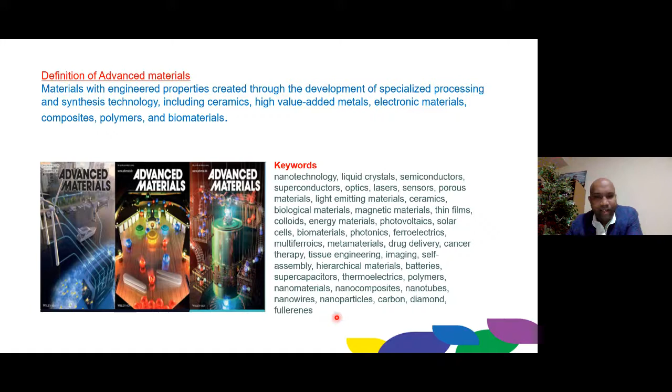And just a quick rundown of the agenda. This is me with the opening remarks, to give you a foundation of the meeting. And then a very exciting keynote talk on materials research in Qatar, challenges and opportunities, from Dr. Hanan from the Corrosion Center. She's the Senior Research Director of the Corrosion Center at QEERI, HBKU. While curating this talk, we had a great conversation regarding various points to be discussed, and she will bring her great experience in this area to give you a very nice talk. I hope you will enjoy it.

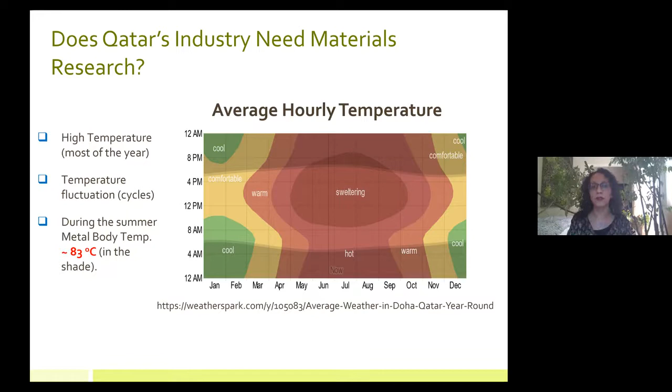So if you measure the metal temperature, the metal body temperature, when you consider the radiant heat, it's around 83 degrees. That's what we measured in the field when we are in the shade. And so you can imagine that it gets very high for metals. And these cycles of temperature create a problem because the metal then starts suffering from stress due to these cycles of temperature.

The other problem we have in the environmental conditions in Qatar is the humidity. We have high humidity in parts of the year, especially the summer months, mainly August and September, but we still see humidity even now in June. The humidity could reach 88%. And when we talk about humidity, we talk about wetness. And when we say that the metal surface is wet, this means that we're getting factors for corrosion. So atmospheric corrosion is a big issue in Qatar.

It adds to it the presence of sandstorms and dust in the air that carries particles like chloride, sulfate, and when they are in contact with water and the metal surface, bingo, you got like a worst case scenario for corrosion. So that also makes the material suffer a lot in our environmental condition.

So this chart is one of my favorite charts. I've used it a lot and I still like to use it because I would say this is the evidence that we got from Qatar Petroleum. On a rare occasion, Qatar Petroleum did a survey of their failures between 2002 and 2006. So they looked at all the failures that the company had, and what caused these failures. I guess Qatar's name is missed here. So it's the Qatar Petroleum chart.

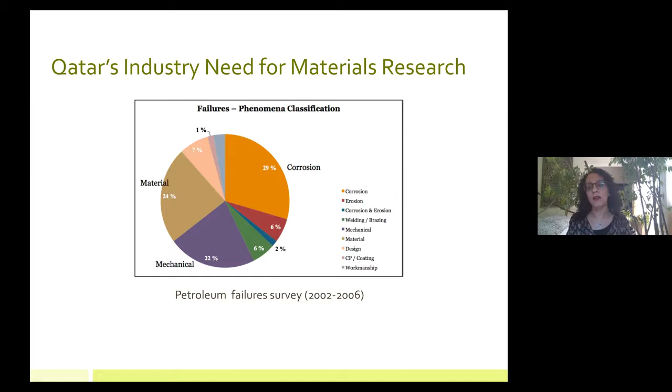So where we are now in Qatar, most of the material science research is focused on developing new products. We see people making new coatings, developing new membranes, enhancing material properties, developing heat treatment procedures. We're looking into making new products all the time. And these products are mostly tested in the labs, which makes it difficult to prove if they can actually perform well in industrial applications. So these great products have been developed, but there was no testing that shows how they work in the real operating conditions, which makes it difficult to market and use these products. So that's what we mostly are doing, and we should try to look at a different perspective here.

Field studies that we do are very, very limited. And the problem is the limited access to industrial fields. Some people were lucky, they get to work with Shell Qatar, for example, and they give you access to their platform, so you can put samples there and look at them. You could put samples in streams and look at their corrosion or their behavior. So these are lucky researchers, but not all of us had that opportunity. So that's the problem.

Some of us work on simulated field studies. So they simulate the field conditions in the lab, but it's also challenging because the real field conditions are sometimes difficult to simulate in the lab. I'm going to give an example of this. I've been working for the past, let's say, 8 years on chloride stress corrosion cracking. My area of interest is environmentally assisted cracking, and this is one of them. And so I've been doing this work in the lab to simulate the field conditions. And normally when people do chloride stress corrosion cracking, the common test we use is called the slow strain rate test.

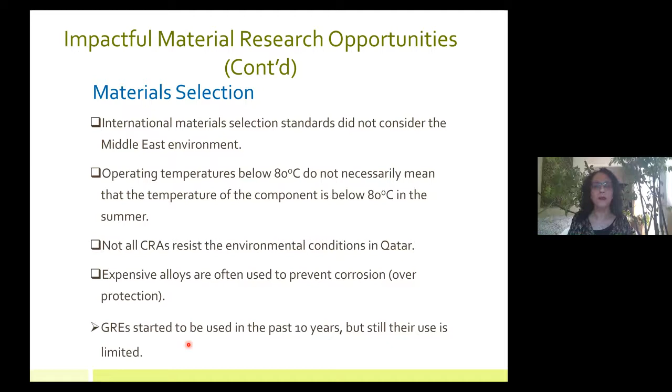GREs started being used around 10 years ago in Qatar, but people are not comfortable with them and they're still not used much. Their use is very limited, and that's an area that can be explored.

So what are the challenges we face? There are a lot of topics we can work on, but we still have very limited industry-oriented research. Why is that happening? It's interesting what you look at - if you look at my first point, Qatar has the highest GDP in the world. This should be good news for us, but unfortunately some are misusing this. I worked in plants in Qatar, and if something fails, what they say is, okay, it failed, let's replace it.

We got the money, that's the attitude. They don't look at it as, oh, it fails. We have to go check and do a proper investigation, simulate the conditions in the lab, look at everything and find out what caused this failure and what we should do to prevent it, using the same material, maybe something even the same price.

And so that's the problem, that people just get used to just replacing things. RDI is still considered a new concept in Qatar. People don't understand what it is.

The other problem we have is that professional development and training opportunities in Qatar are very limited to non-nationals. So you get people who work in the plants for 35, 40 years, and they maybe got training once. Then you come in with a new concept, you want to use new models, apply new software, put sensors to measure and detect leaks. They don't understand this because their knowledge is 40 years old and they consider you a threat. So they don't support it.

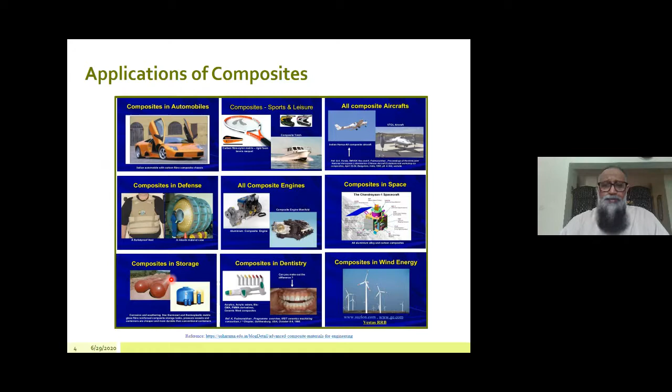So to sum up, we can say that composite material is an important class of engineering materials which have numerous applications in the field. Before going into the detail of the project, let me introduce the concept of composite material for people who are not directly associated with this field.

Basically, a composite material is composed of a matrix material and a reinforcement. The beauty of the composite material is that when these two materials, which are physically and chemically different, are mixed together, the parent phases combine to form a product phase, the composite material, which carries much superior properties as compared to the parent phases.

So the outstanding advantage of composite material is that when two different materials are combined together, they give a product phase that has much superior properties as compared to the parent phases. There are different forms of composite materials, which I will show you in the next slide.

Composite materials can be classified on the basis of matrix materials and on the basis of reinforcement. For example, in the matrix we can have a metal, a polymer, or a ceramic, and people have also categorized carbon as a matrix material. So based upon these matrices, we can have metal composites, polymeric composites and ceramic composites.

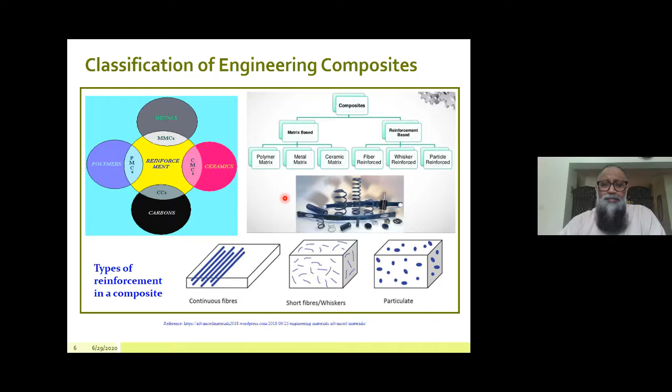Let's talk about aluminum metal matrix composites, because they are finding numerous applications in the automobile industry. As I introduced earlier, aluminum is a lightweight metal, and that is why it carries significant advantages. Aluminum metal composites have important uses in the transportation industry, or we can say the automobile industry.

It is not only the economy that is related to fuel consumption. It also contributes indirectly to controlling environmental pollution, because we are using less fuel, and that will pollute the environment less. So that is why aluminum metal composites are finding extensive application in many automobile industries.

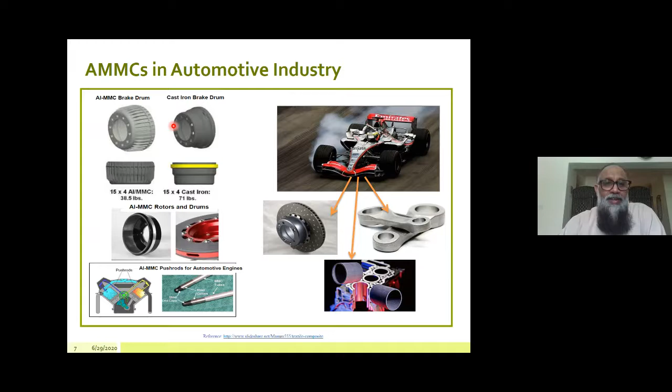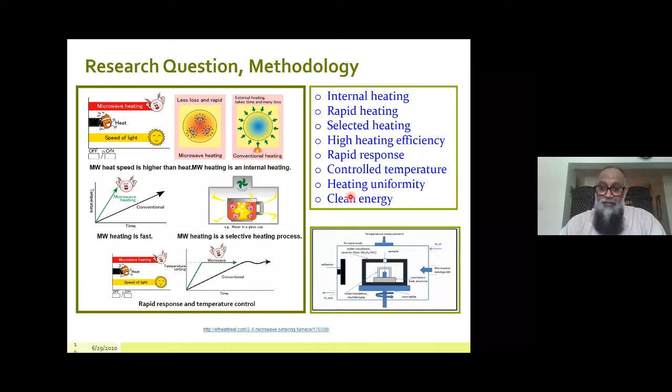So we have developed many compositions for aluminum metal composites, but because of time limitations, we will be briefly focusing on 4 compositions: aluminum silicon carbide nanocomposites, aluminum oxide nanocomposites, aluminum boron nitride, and aluminum titanium carbide nanocomposites. These are the 4 compositions which will be briefly talked about in today's talk.

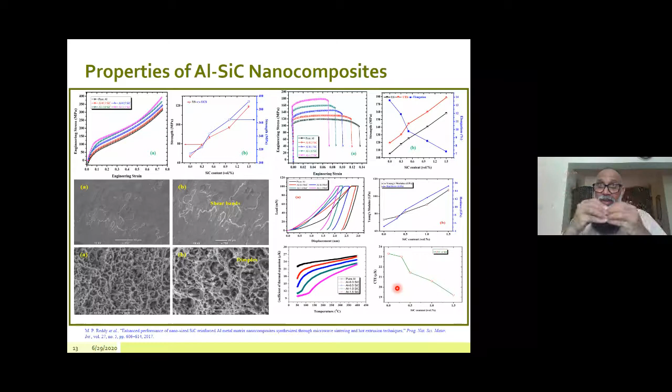We also studied the coefficient of thermal expansion of all the developed compositions. The coefficient of thermal expansion decreases with increasing silicon carbide nanoparticles in the matrix. This is a very important criterion, because in automobiles, especially in moving parts, the coefficient of thermal expansion is very important. Two parts moving relative to each other, because of their movement and the temperature, may choke together if there is high thermal expansion. That will hinder the performance of any vehicle. That is why the decrease in thermal expansion coefficient has a useful impact on the performance of moving parts in the automobile.

The second composition I would like to share is the aluminum oxide nanocomposites.

So we have... Sorry to interrupt. You have a couple of minutes.

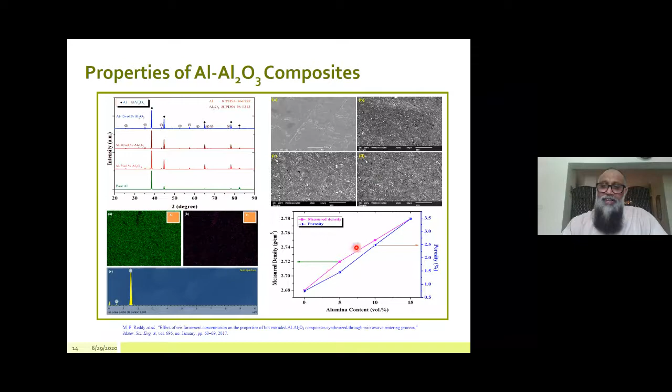And these are some mechanical properties as I have discussed earlier. With the increasing amount of boron nitride in the aluminum matrix, we have seen improvement in the tensile strength and compressive strength, and we have observed a reduction in the elongation. So these are also similar results as I have explained earlier.

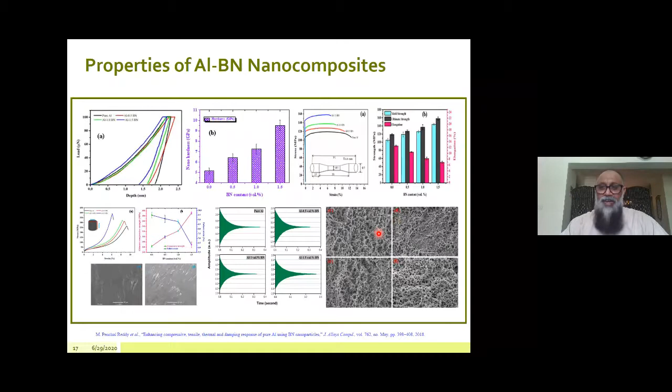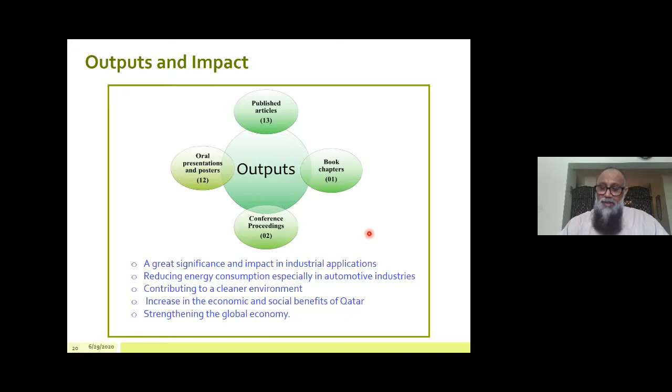As far as the impact is concerned, with the development of a novel formulation with promising mechanical, structural and thermal properties, it is anticipated that they have good applications in the automobile industry, and a lot of fuel consumption is reduced. Because of the utilization of less fuel to drive the vehicles, we think that it has an indirect impact on our climate and the environment. There will be less pollution because of less fuel being injected into the automobiles.

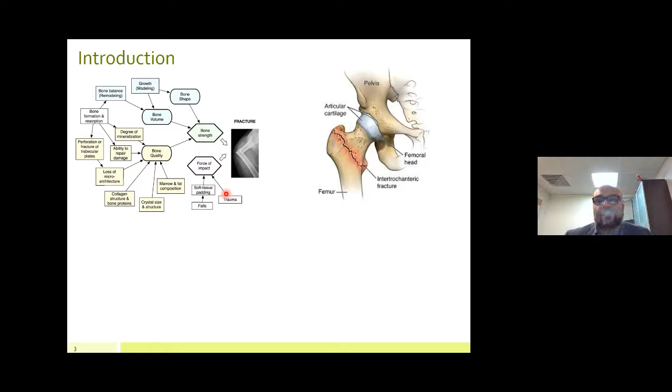Usually it is when you have a fall. This is very common in elderly people, especially females who have osteoporosis, and when they have a fall, it will lead towards a high impact on your bone and cause fracture. And also during trauma, for example, an accident can happen to young adults. The accident can be through automotive or through sports where there's a high impact on the bone and the femur bone fractures. All these conditions require hip replacement.

And the hip fracture is not something that you want to face. It will cause a lot of discomfort and will affect the quality of life. As you know, the femur or the hip bone is actually carrying the weight of the body.

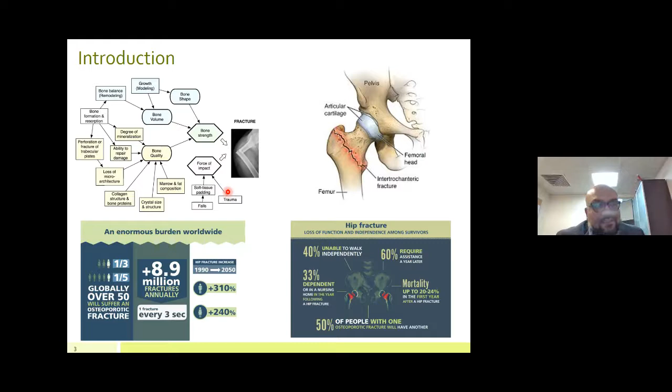So this joint is very crucial to have a good quality of life. Now, is this a burden? Yes, this is a burden, and every year the number of fractures is increasing, mainly due to the lifestyle that we have today, where obesity is on the rise, and obesity also leads towards poor bone quality and extra weight on the bone, and this increases the risk factor for bone fracture. So femur bone fracture leading to hip failure is not uncommon, as I said earlier, and this is an issue globally.

Right, if you allow me, just to give you the market of just the hip replacement itself, the whole process, the market currently is around 7.13 billion, and by 2026 it's expected to reach around 10 billion. This is the market size just for hip replacement, not looking at other joints in the body. So as you can see, it's a very big market, and this is something that is happening very frequently. So the hip fracture, as I mentioned, is unavoidable and it's a billion-dollar industry.

But what is important within this hip replacement is that between 5 to 15% of the patients who have received this replacement are required to undergo a revision surgery. That means a second surgery. Why? Because the hip implant failed after a couple of years in the patient. So this hip revision is a very costly process. It's very complicated, it takes more time, and it's something that we want to avoid, if possible, for patients who are receiving the hip implants.

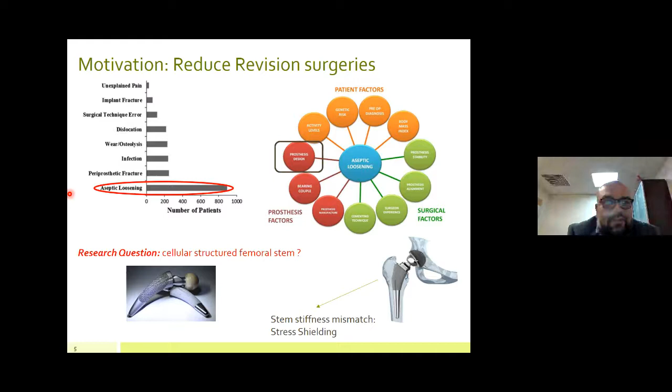Once the femur bone loses density, the quality of the bone surrounding the stem decreases, and this will affect the stability of the implant in the femur bone, resulting in the failure of the implant and the requirement of a revision surgery. So the research question that we had in mind is, can we reduce the stiffness of bulk titanium by introducing a cellular structured femoral stem?

That means instead of using dense bulk titanium, can we design a complex structure within the titanium, whereby we are still using titanium, but due to the cellular structure, we bring down the stiffness as close as possible to the femur bone, such that we can reduce the stress shielding and therefore improve the stability between the stem and the bone. So that is the research question that we had in mind.

Now, the main objective for this study is that we were looking into developing a fatigue design space for cementless porous stems, where we hope to achieve a stiffness of the stems as close as possible to the femur bone. At the same time, we're trying to reduce the stress shielding, and finally enhance the stability by increasing the contact between the bone and the implant. Most of the work was done computationally, and we did one or two fatigue tests. So this is the limitation of the study.

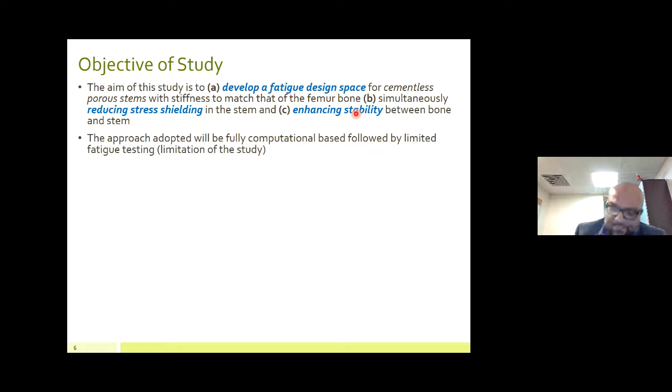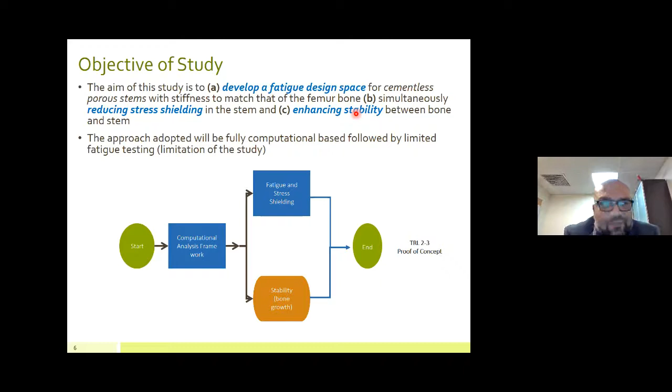Allow me to share with you a flow chart. So basically, the whole project was design-based through a computational approach. We had two aspects. One is looking at the stress part, and one is looking at the stability, basically the bone growth around the stem. And from this, we came out with novel designs, porous structures, which achieved the objective of the study. And at this stage, we achieved a TRL of 2 or 3. which is a proof of concept.

Right, let me give you an overview of how we proceeded with the study. Generally, we looked at the microstructure part: how can we design a porous structure?

We did some sensitivity analysis to play around with the size of the unit cell of the porous structure to make sure we achieve effective properties close to that of the bone. Once we designed the porous structure, we had it embedded into the stem, where the outer part is a dense shell and the inner part is the porous structure. This whole combination gives us our femoral stem.

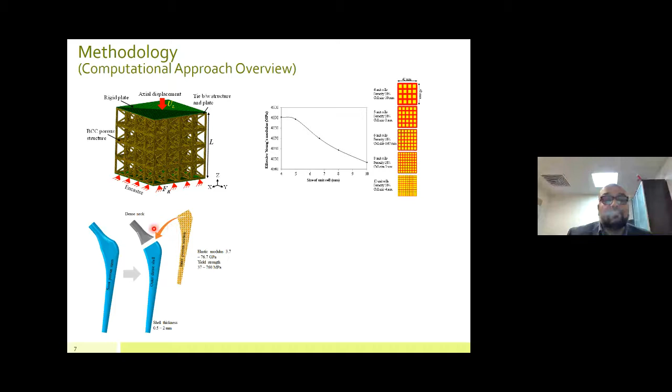To repeat, the outer part is a dense shell within 0.5 to 2 millimeters - these are our design parameters. Inside this dense shell is where we embed the porous structure made from titanium. This whole volume of porous structure reduces the mass of the overall implant compared to bulk titanium, and also manages to reduce the stiffness of the bulk titanium close to that of the bone.

By using the ISO standard, we managed to conduct our studies through the computational approach. The first step was we created a few microstructure unit cells, and then we looked at which of these unit cells, after going through this process, give us properties close to the femur bone.

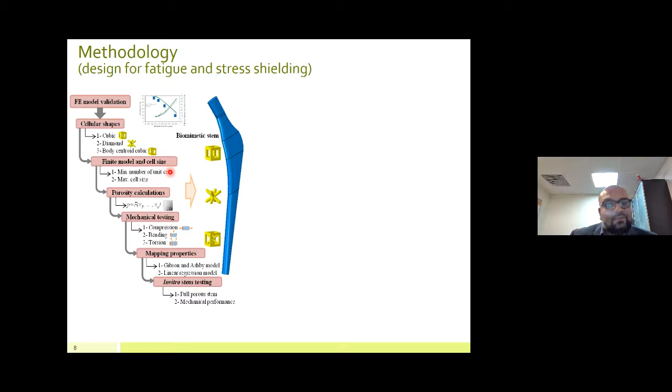This is the roadmap that we took, and once we found the properties of the microstructure and the way to design it to achieve ultimate stiffness close to the femur bone, that was our design. Then we used that to construct the full implant. So this explains the approach.

We basically played with different porosities of the microstructure. We had some compression tests to determine the elastic modulus and the yield strength, and then the best candidate gave us the full model of the stem.

Once we achieved the full model of the stem, we proceeded in two aspects. It was reported in literature that cellular structures have a fatigue strength of about 0.3 of the yield strength. Taking into account this finding, looking at the stiffness of the stems and trying to push it close towards bone stiffness, and looking at the stresses in the dense section of the implants, we created a design space. This design space is where our design parameters fulfill the requirement of the implant.

To strengthen this further, we went into actual fatigue analysis. We used the Soderberg approach, and created another design space from this, then combined both design spaces in a more conservative manner to achieve the final design space, which we'll share with you later. This final design space allows designers to select design variables customized for different patients. That's the idea of creating such a design space.

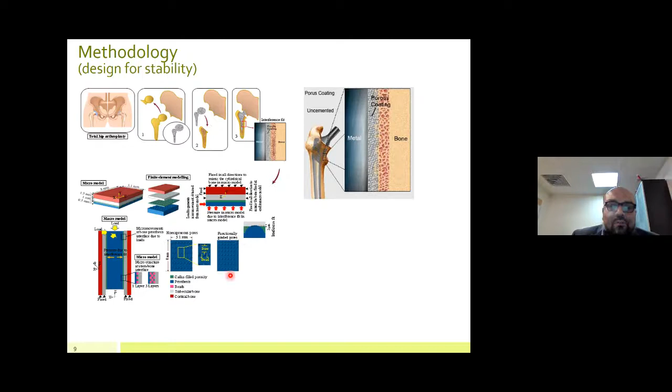Traditionally, most implants use a coating onto the metal, and this coating is a sprayed coating, very random. We want to bring this one step forward and design the way we do the coating, through introduction of beads.

Arrangements of pores or beads on the stem to improve the anchorage between the metal implant and the bone. We played with various combinations on how we can arrange the pores or beads on the outer surface of the implant and see which configurations allow better bone growth, which in return improves stability.

And we basically developed our own algorithm where these are the various options of... can you hear me? Yeah.

These are the various options of designing the pores or beads. And then we have the finite element model. Here, we have developed an algorithm that simulates bone growth by looking at the strains on the tissue.

Various micromotions lead to different strains, and these strains lead to different promotion of bone growth. So there was an algorithm developed, and we used this algorithm to study if a particular design of the pores or beads actually enhances tissue growth on the stem. This tissue growth is needed to enhance the stability between the implant and the bone.

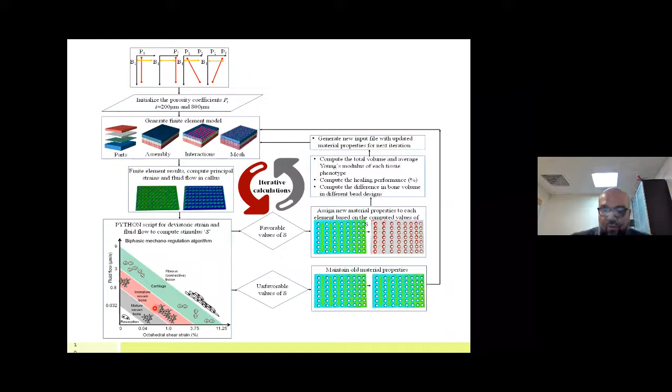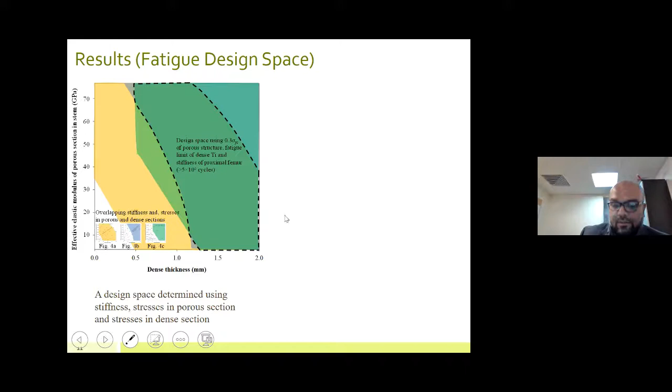Let me just go back one slide. So the second design space, that is the final design space. That's where we incorporated the design space on the left with the Soderberg approach. The gray area is the targeted area that we will use in selecting design parameters that we will later fabricate and test for our fatigue testing.

So these findings showed that the different pore designs actually affect the way you increase your stability. And this study shows that we can achieve significant bone growth, at least through the computational approach.

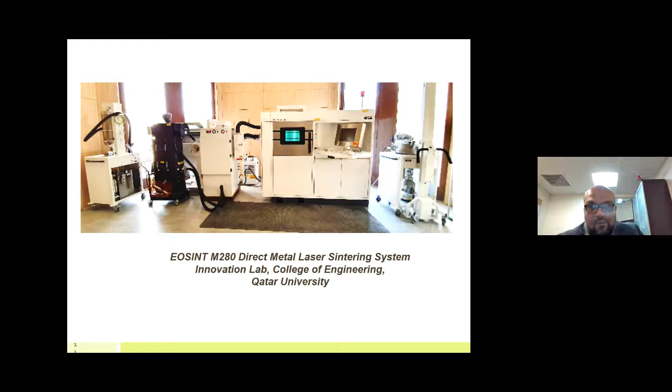Finally, we managed to design - we have a final design here, and we managed to print the stems, and we tested the stems in fatigue, and they achieved beyond 5 million cycles, which is what we are looking for. But there's still room for improvement, but this is a good achievement for a concept stage.

So all this was done here in Qatar. And the outputs is we managed to achieve a full porous stem of 20 gigapascal, quite close to the stiffness of the femur bone, and we managed to reduce the stress shielding by 30%. So most of our targets in the project were achieved. And also with our new approach in the algorithm for stability, we have proven that we can enhance the bone growth along the stem by designing certain pores or beads on the outer part of the implant.

Now, in terms of benefits, this study shows that we have the capability of designing new implants which can be customized for patients. Currently, most implants in the market are not customized - they are bulk design, so the surgeons during the surgery will adjust the fixtures in the stems to fit the patients. But with this now, we can have specific implants designed for patients based on their bone strength, based on their height, their weight, and so forth.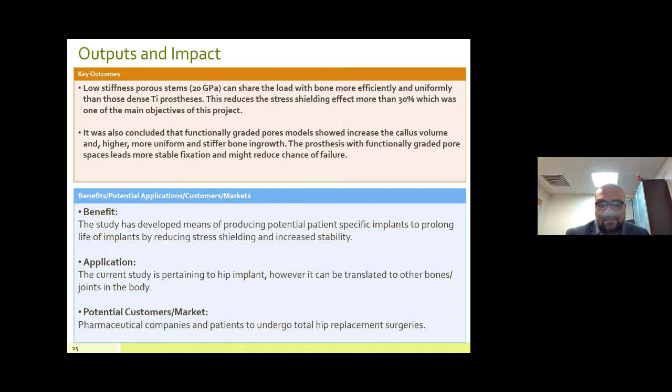So this is a concept that we just came from this study, and we are happy with the concept, and we hope to bring this forward.

So we just completed stage 1, and there is still a long way to go before we can actually see this in the market. Stage 2 basically is we have to further enhance the experimental study in terms of more fatigue designs, more fatigue testing, and improving the design, followed by some cadaver testing, where we will put this implant in cadaver legs and use some hip simulator overseas to see the performance of the implants in the actual gait cycle.

And once stages 2A, 2B are clear, then maybe perhaps in stage 3 we are looking for some clinical trials if that is possible. But the whole duration from stage 2 to 3 will take around 7 to 8 years before we can actually see a finalized concept to be commercialized. So the research work has given us 6 papers, which we are happy to publish with the team.

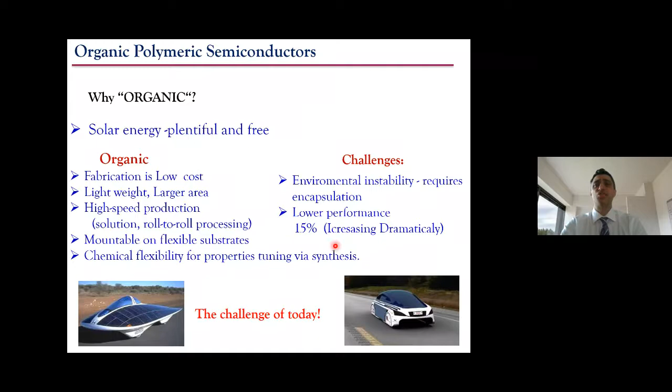However, there are challenges associated with these materials. For example, their environmental instability and their lower performance. I've put lower performance in terms of that we've reached 15%, and about 3 days ago, these materials have reached 18%. So it is increasing dramatically over the last 5 to 10 years.

So if we want to visualize the future for 1 second, think of materials that could be low cost. We could reduce the carbon emission, carbon dioxide emission in particular. And imagine there are currently about 1.5 billion people out there without electricity. If we can make materials that are affordable and cheap, everyone in the world could have a better life.

So visualizing the future for 1 second, if we could learn from the materials that we have from graphene, implement it into the plastic electronics or conjugated materials, we could derive new materials that are advanced and a new energy source could be obtained. We don't have to rely on hydrocarbons from the petrochemical industry. We could leave the hydrocarbons for more essential stuff, for the pharmaceuticals, for advanced material processing. So that is basically the idea.

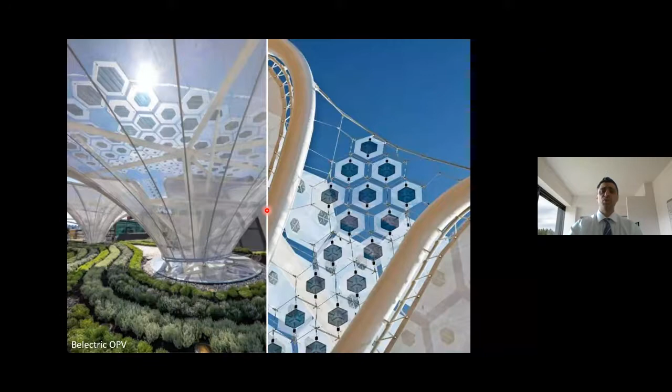And you can see that these materials could be utilized on buildings or even on stadiums. So for example, in Qatar, we have the World Cup coming around soon. Imagine we could have a stadium where during the day, all the sun is absorbed, and then you could turn on the stadium at night with these materials. If you've been to Singapore, for instance, there's a park in the middle. Imagine we could have these materials that are organic based, flexible, that absorb the light during the day, and light up the park during the night without using any electricity.

Other aspects of these plastic electronics, I had a video, but I'm not going to play it in case it might not work. So these have huge amounts in medical applications, in gaming. Again, a lot of people like to read on the plane. All of us use iPads. Imagine you could download the material that you have on a small pen and then read it at your own convenience. A lot of people are using iPads. It could save storage and space.

Recently, the project allowed us to publish one of the highest impact papers, I think, in research, based on designing flexible and stretchable electronics. So if you're interested, please have a dig and read more about these flexible electronics that we have demonstrated.

So what was the idea of the project? The idea of the project was, can we utilize sustainable materials? Fabricate them without using any halogenated solvent, with mild process conditions. Can we have atom economy, in terms of it's non-toxic? Can we make materials that are biosustainable and renewable?

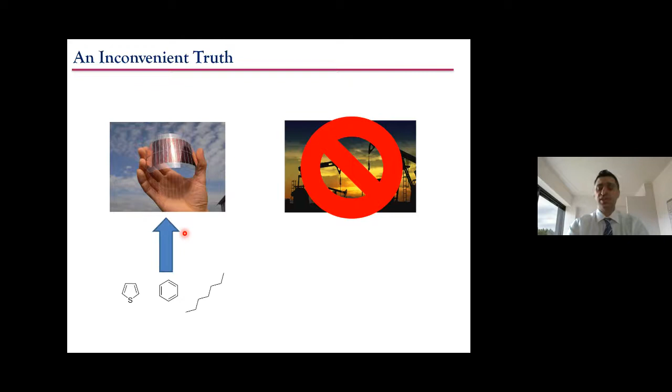Unfortunately, most of the time, till now, we need to utilize the petrochemical industry to make these materials. Can we avoid that? The truth is, we still need the petrochemical industry to derive our starting material. Can we use something alternative? Can we make it sustainable without using any fossil fuels? However, waste is another problem as well. When you have conjugated materials or any materials, you're generating waste. Can we improve biocompatibility, which would lead to better bioelectronics?

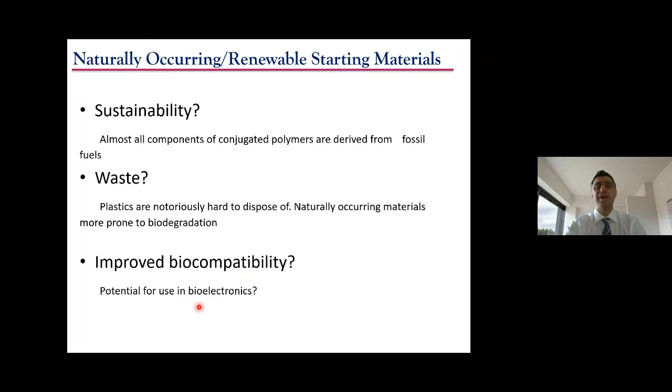Unfortunately, it's predicted that in 2050, there's going to be more plastic in the sea than fish. So obviously, fish lovers are going to suffer. And plastics are known to be notorious for getting disposed of. That's a problem.

So where was our starting point? Can we avoid using fossil fuels and use a nature-derived material to obtain the conjugated material that we want? Can we make the entire material sustainable, derived from nature? Having a material with a furan that could be obtained from corn, having side chains that could be obtained from coconuts, and obviously nitrogen and all other sources can be available.

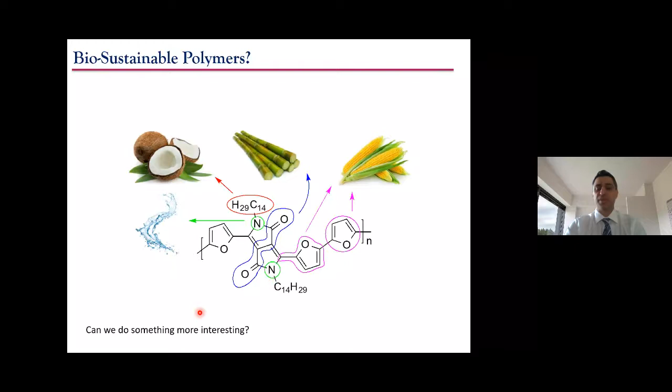Can we do something interesting? So my group looks into thiazole materials. The medics, or the people that work in the medical field, know these thiazole materials are very useful. They're building blocks for anti-cancer and antimicrobial behavior. They're available in many varieties of foods that we eat.

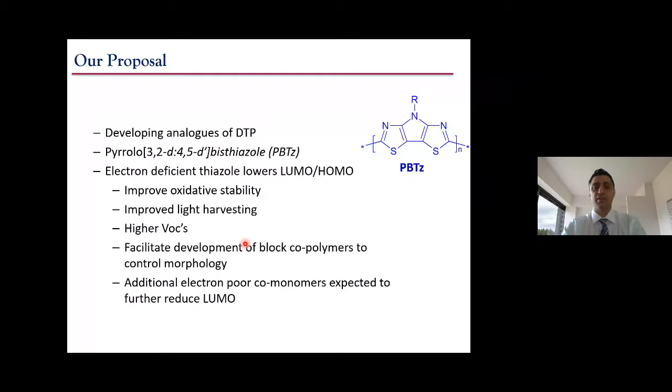It's based on a 5-membered ring with nitrogen and sulfur. So can we make materials based on this thiazole, or you could call it pyrrole system, that could obtain efficiencies or mobilities for plastic electronics? So the idea basically, as I said, we need to learn from graphene, and can we make ladder-type materials that could be also thermochromic?

So for example, at night or even during the day when it's hot, the material lets light in, but it stops any of the heat coming through by changing color. Can we do all that and have the material be intact? So as I said, graphene is very good for that. However, the problem with graphene is its solubility.

With these conjugated materials, we have the problem of torsional defects. So basically they rotate and they cause problems. However, graphene doesn't have that. We aim to make a material in between these two that eliminates these torsional defects, that is similar to graphene, but can give you solubility.

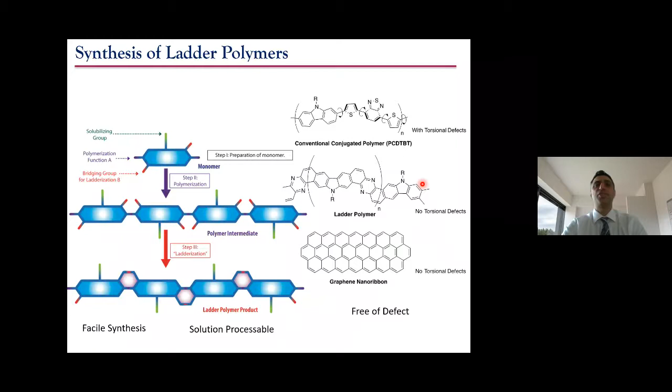So the work was perceived really well by the research community, and they liked our work so that they put it on their front cover in Chemical Science on 2 different occasions, in 2016 and 2017, where we demonstrated that we can make such materials. I will speak to you a bit more about them. Also recently, Chemistry of Materials highlighted the work on their front page, where we use these for plastic electronics, and we made some nice materials.

So the postdoc that was working in the group, Maciej Barlog, the idea was to implement these thiazoles, the nature-derived, thiazole-based electron-deficient system, on these ladder-type systems. I'm not going to talk about the synthesis, I'm going to keep it basic, but we managed to make some different materials having different alkyl chains to give us the solubility for these materials.

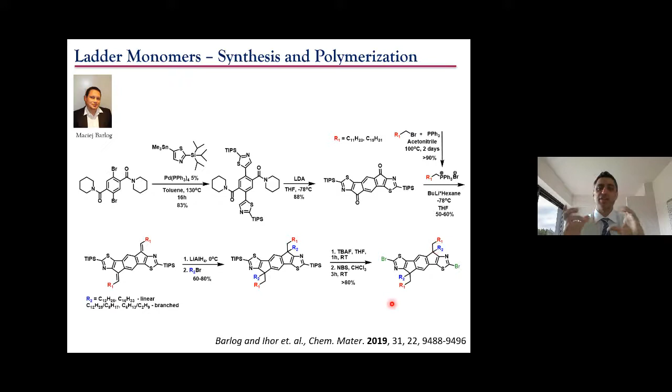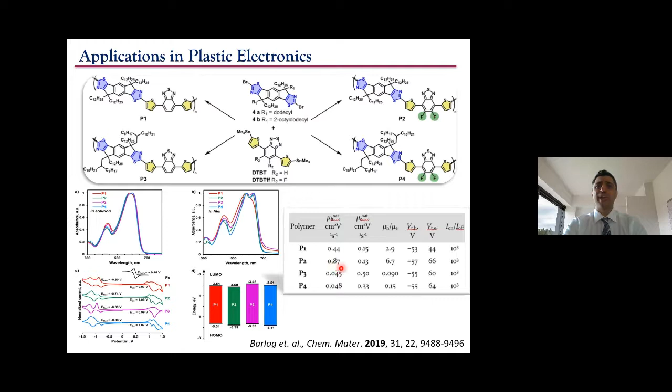We made some polymers, and as you can see from the table over here, the highest mobility we obtained was 0.87. I should just highlight this. This is probably one of the highest mobilities reported to date with these types of thiazole materials. Usually the values go between 0.2 to 0.5, but 0.87 is one of the highest reported to date.

We were also interested not only to see if thiazole had an effect, but can we change a heteroatom? For example, sulfur is naturally available. Garlic contains a lot of sulfur. Can we change the carbon or nitrogen to sulfur and to selenium, modify the ring system and get mobilities? And this work was published in Macromolecules, which showed good mobilities for these materials.

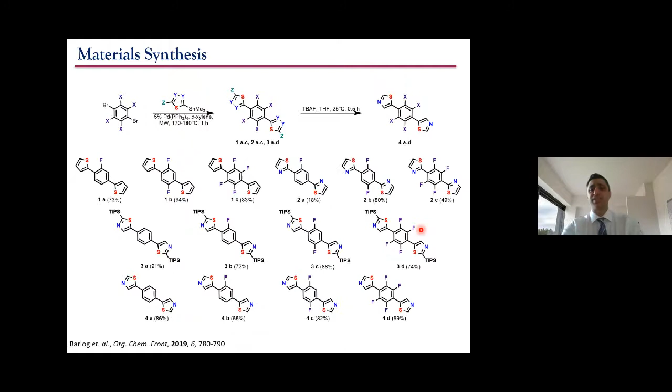So we come back to the aspect of direct alignment, as the project title was. So the idea was to put fluorinated parts on these systems, having a thiazole, having the thiophene, and having different groups. So Maciej managed to make about 15 different compounds. Again, pharmaceutical companies would love things like this. We made 15 different compounds, and we obtained X-ray structures of these compounds showing their analysis. And it was most recently published in Organic Chemistry Frontiers.

While the paper was out, we got approached by some people in Japan. They said they're interested in the materials that we're making, and could they use them for biological materials? So currently we are in talks with them to see how we can push forward in terms of them taking our materials. Biomedical applications for these fluorinated compounds containing the thiazole have attracted attention because it's involved in biology. They're also used for batteries and other polymers, and obviously the famous one, Kevlar, as well.

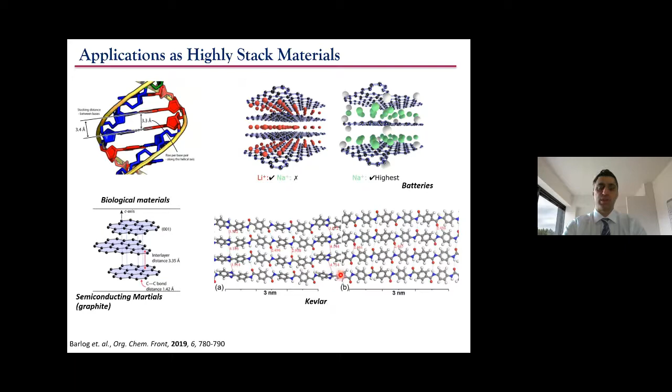What has been the impact of this project? We've demonstrated that we could have a fundamental science toolkit to integrate into bioelectronics. We have intellectual property on this project in the US and in Europe as well, on these materials. We've managed to publish 5 high impact journal publications. Not only are they high impact, but they've been selected to be on the front cover.

The postdocs, the researchers, Maciej himself won an award by presenting some of the research that we did in Spain in one of the top international material conferences. One of the graduate students that was working on the project, Dusulu, was selected to get an award as a postdoctoral research fellowship. After her graduate program fellowship ended, she applied for a postdoctoral fellowship, I wrote a support letter, it got accepted, and now she's a postdoc at one of the American universities in the States.

So what's the future with this? We've utilized nature-inspired materials to derive what we want for plastic electronics. So the idea is, if we could get more funding, can we use fruit-inspired materials? I love blueberries. To my surprise, blueberries are a conjugated material. As I Googled it and looked at the structure, it's quite conjugated. People might tell me it's quite expensive, but we're not talking about the fruit itself. Some fruits go off later on. Can we utilize the rotten fruit and use the same materials to extend it to plastic electronics?

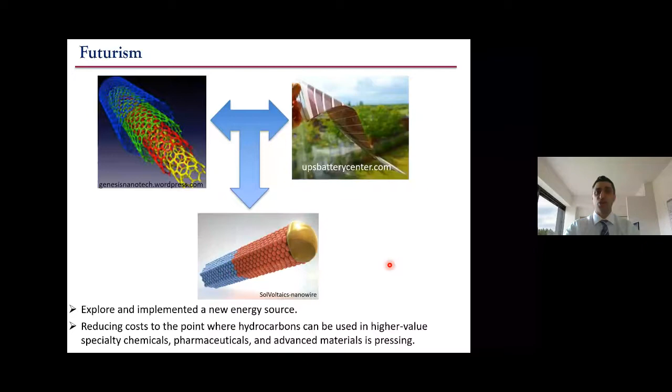But in terms of the mechanical bend, how mechanically we can bend them, how many cycles they last for the particular materials that I've worked on, we haven't tested that. But we're obviously open to people to engage that would be interested to test these materials further. Again, at the early stages, our interest is, can it generate efficiency? Does it have good mobility? And obviously, we are willing to improve on these materials and work on it.

As I said, interest from Japan was received, which is nice. Would like to get interest from people in Qatar to look into our materials. The issue that we have is we get interest from other people outside. We have to send the materials and we wait for a very long time to get the results back. But if we get interest from people in Qatar industry, we're more than happy to provide them our materials if they are interested. Thank you.

So you touched upon the Qatar context. I want you to elaborate more on that. Plastic electronics, organic electronics within the Qatar context. Which sector can benefit from this technology? As I collaborate a lot with Total and Shell, and I'm hoping they're listening here as well. So a lot of companies here can benefit. As I said, plastic electronics is not just for certain companies. The medical companies, the medical field could also relate.

As I said, one of the biggest things now that's emerging technology is the electronic skin. What do I mean by electronic skin? So we have these conjugated materials that are quite flexible. So imagine yourself, you put these flexible materials on your hands. You're sitting on a beach, right? And then suddenly you're exposing yourself to too much radiation. This electric material which is on your skin will basically trigger something. It tells you that you've exposed yourself too much, go and put some sun lotion.

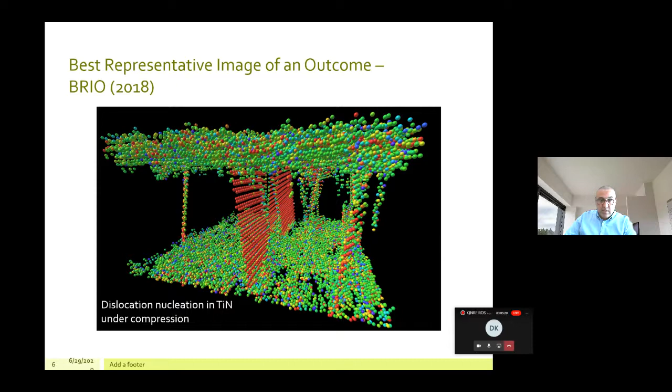But here, by way of these molecular dynamics simulations, a lot of the work came out of Dr. Ayub's efforts. We clearly demonstrated that there is a way for us to have dislocation nucleation inside ceramics without cracking. So hang on to this thought, because this is important, because this is something that's going to link to our design of these nanolaminate structures, which goes to the heart of the problem that we were trying to address.

So the outputs, as I've shown you, were significant. I believe that the new science and the applied sense, the experiment techniques and the modeling techniques that came out were successful in tackling some parts of these fundamental questions, which had to do with, can we engineer a nanolaminate?

I'll explain what that is, and can it basically perform under extreme service environments? So those of you in the audience, corrosion tends to happen when you expose a metal to the environment.

The simplest way to stop this degradation of a metallic surface is to take a barrier and put it on top, creating a disconnection between the substrate and the environment. If you don't do that, you'll have corrosion. If you can do that, it reduces corrosion. And if you do it efficiently, you can reduce some of the costs.

I've pulled this statistic off the internet: the US alone spends about $300 billion annually on corrosion. So imagine if we can have materials applied to critical assets that create this disconnect and provide the corrosion protection we need, but also give us some materials' mechanical properties. That's a win-win solution, and that's what we were after.

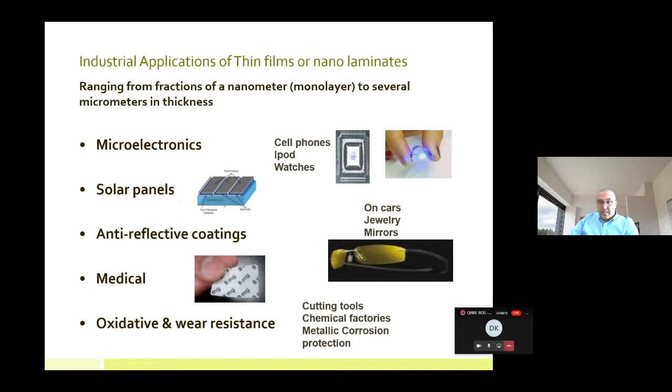How are they different? What is the challenge? If you look at this plot, ceramic materials lie here - they're very strong, but they have limited ductility. That's where the compromise comes in. You can apply them as a coating to protect the substrate, but the problem is they tend to break. When they break, they open up and basically break that barrier you wanted to create with the environment. So how can we address that?

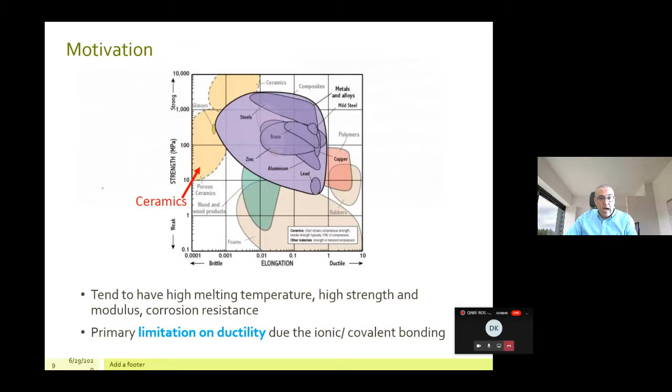With a copper niobium combination, you can get strengths of up to 2 gigapascals, which is very strong - almost close to the theoretical strength achievable in these metals. Or with copper nickel, you can get strengths close to about 1.6 GPa. So mechanical properties certainly can be improved, and metals tend to have a lot of ductility, which addresses some of the problems we've seen in thin films. They also give advantages like fatigue resistance and radiation resistance.

However, the problem is corrosion. If you use this in the oil and gas industry, putting copper and niobium together as a bimetallic couple is a recipe for disaster - you will have galvanic corrosion. You cannot do that. So the answer to these two fundamental problems - can we have high strength and adequate corrosion response - begs that you use ceramic materials in some shape.

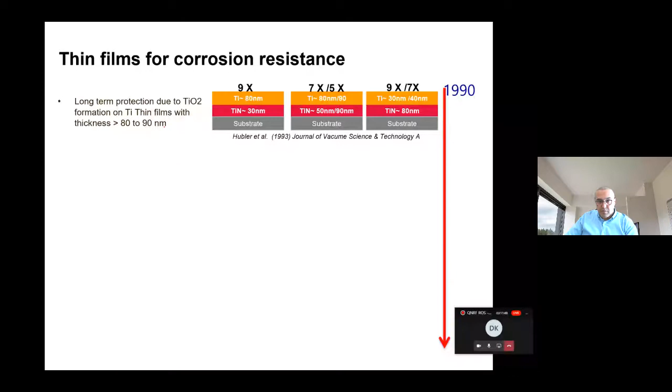Can we do that without compromising the mechanical properties? The part that had to do with thin films and corrosion resistance—this concept has been tried. If you look at the data published in literature, you'd notice that all the way from the 1990s, people have been trying titanium nitrides, titaniums with different kinds of combinations, and they've had some success. However, when it comes to ceramic inner layers, the fundamental question is how thick you want the ceramic to be, how thick you want the metal in combination with the ceramic to be, and is there a technique out there that can do that fast enough and without defects?

So this is where the first part of the project comes in. These are some thin films that were fabricated at Washington State University, basically by magnetron sputtering. Then some RF sputtering was carried out for the nitrides, and we also tried some DC sputtering. So we had different ideas in mind. We also applied some deformation-based methodologies to create these coatings, or create these nanolaminates.

Here, what you see is a TEM image that was taken here in Qatar. You can see a titanium layer, which is about 4.2 nanometers, and then a titanium nitride layer, which is about 60 nanometers. So we're able to achieve these alternating layers, but the question was, can we control it? Another thing, if you look at these glancing angles, you can sort of confirm that these are indeed titanium and titanium nitride, so we had some confidence.

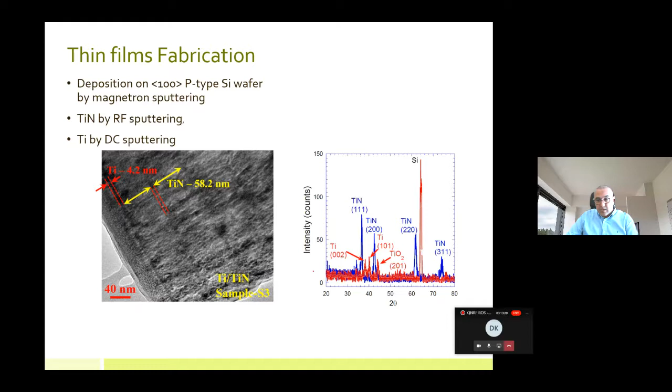So one part of the project was the materials fabrication, and I'm happy to report that by year 3 we were able to successfully produce a lot of thin films with good control over the periods, and that allowed us to do our study, which I'm going to talk about in a little bit. This is what an SEM image basically shows—the alternating layers—and you can notice how we can control the periods and the thicknesses involved.

Based on these successes that we had early in the project, we were able to create a short study, which was carried out in Qatar. We took 5 different materials. We started with a titanium nitride, which was about 90 nanometers, then had a counter to that with a very thick nitride system, and then a combination of a thin inner layer of metal and a thick inner layer of metal. So please keep this in mind, it will make life easy when I show you some of the other results.

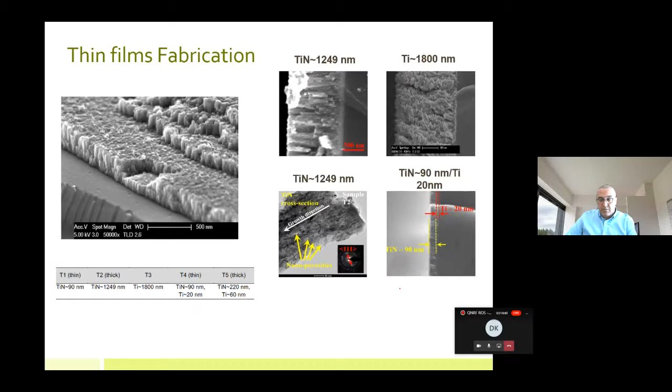Now, I must confess that while we were working on this project, the processing was still being evolved. As you can see, some of these pores are visible. So the corrosion response that we were able to achieve was with these defects in mind, and that basically would qualify some of the conclusions that I'm going to make.

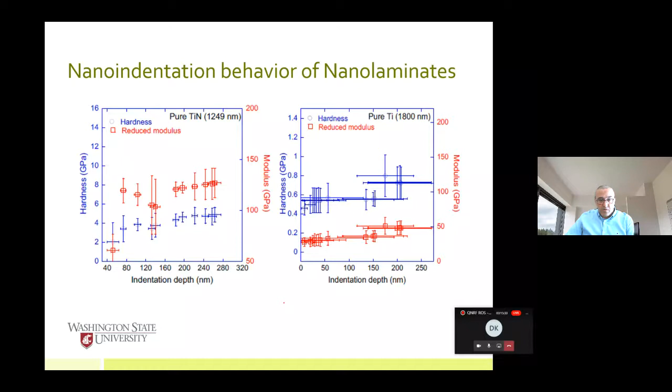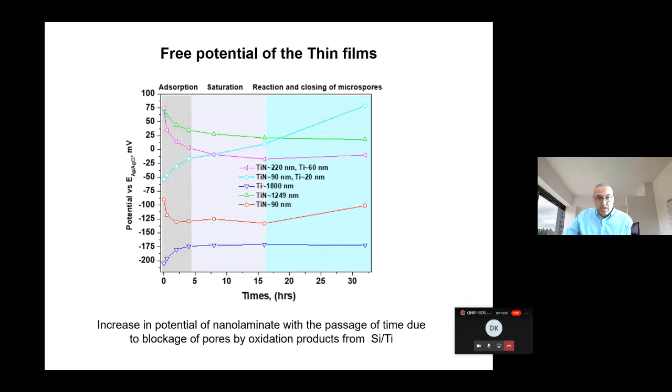Now, so in year 3, we wanted to look at some of the corrosion response of these materials, and as you can see, if you look at the different combinations, you would notice that the behavior for the titanium nitride with the inner layer tends to be far superior, and we had a hunch that it had to do with how much blockage the thin titanium layer, or the thick titanium layer, the inner layer, was offering. So we went ahead and did some electrochemistry studies on these materials, and again you would notice that initially we could see that the response for the inner layer that was thin was superior by 1,000% when it comes to corrosion protection, and these are about 16 hours.

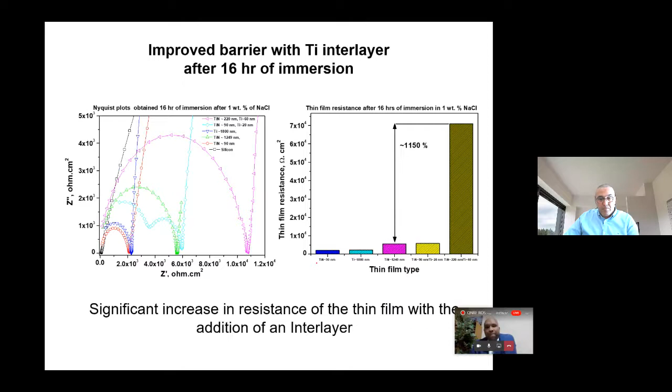When we extended this study and continued for about 32 hours or so, you could start to see that the titanium nitride and the interlayer differences become a lot more comparable. However, again, with the caveat that there were some defects that we saw in our material.

And I can see Dr. Parkalan on board, so it probably means that you have a couple of minutes here. Which is fine, I think I'm on time.

Bottom line is that the significant increase in resistance that you would see with these nanolaminates when you have an interlayer is basically a function of the period of immersion. So we were able to at least get a sense of how our nanolaminates would behave if we were to put them in a more energy-intensive environment.

A lot of work was done on characterizing these materials at higher temperatures for creep response. This is a very involved study requiring specialized tools, many of which were not initially available in Qatar, so we relied heavily on Washington State University. But thanks to QEERI, a lot of these electron microscopy systems are now available, which allowed us to make quick progress. Again, the result here shows that the interlayer material still behaves a lot nobler.

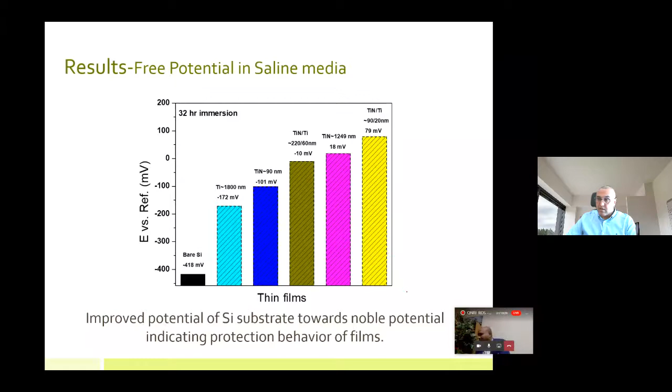The overall process we were able to uncover was that the pinholes and defects that exist when you deposit these materials are really the controlling factor. If you're able to deposit a solid layer of metal on top of whatever substrate you have, you can get a better response. But this begs the question: if the substrate is not a nobler material, you'll run into galvanic corrosion issues. So that's where we were.

I want to acknowledge QNRF for providing the support. I also want to capture the international nature of the work and all the students involved. You see here Parker West, he visited us from main campus. Anna initially worked on this project and is now about to finish her PhD. Mustafa is now a PhD student at University of Michigan, and Jahanzeb, who also graduated, is now at Intel working as a process engineer. So with that, I'll conclude. If there are any questions, I'm happy to answer. I'm sorry this was a more overview-ish presentation, but I wanted to capture the outcomes that were produced. Thank you.

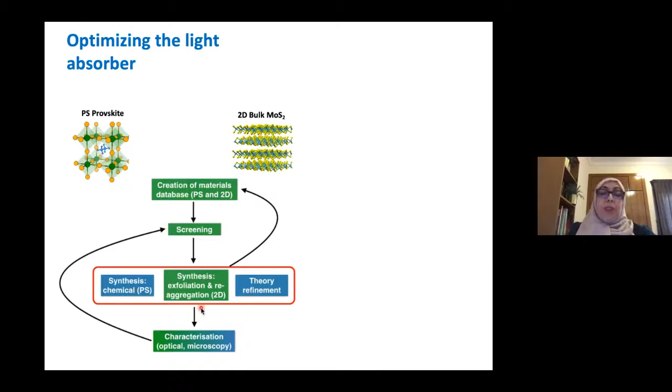And then, as you can see, we go towards theory refinement. I will talk about that in a little while. And also, if materials are promising, we go to the lab synthesis of the thin films, then to the characterization, and then to the device.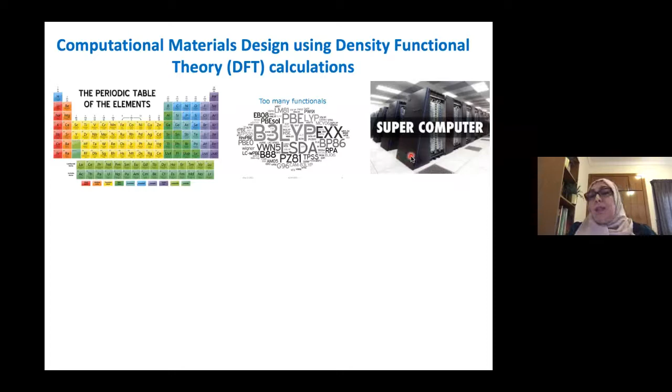So what is computational materials design? It often uses density functional theory, so-called DFT calculations, where we start from the periodic table of elements, and we use certain formalisms within DFT, approximations, and so on. And we often use supercomputers to optimize the loads for that task.

And then in the case of our scope, where we wanted to design efficient, stable, low cost and also environmentally friendly solar cell materials, we start simply from input structures, so different crystal structures with different compositions. Then we obtain the results from density functional theory, we process them, and we relate that to the optical properties, which are really the very first and important parameter needed for this class of material, because we're looking for materials that absorb the sunlight.

So using this approach, we go back to our screening. We can have a very rough estimate of the power conversion efficiency. If a material falls within the range that is of interest for us, we keep it and process it further. And if materials do not fulfill that basic requirement, they are discarded, and we keep them for other types of application, and we store them in our database.

So I will be presenting very quickly two types of investigations that we have undertaken. The first type is driven by questions raised by the experiments, where we do the computation, come up with some theories, and help the experiment interpret their findings. And on the other side, which is a little bit more new and emerging, we start from computation. We propose materials for experiments. We validate them in laboratory setting, and then we keep improving the materials until we get the properties that we are interested in.

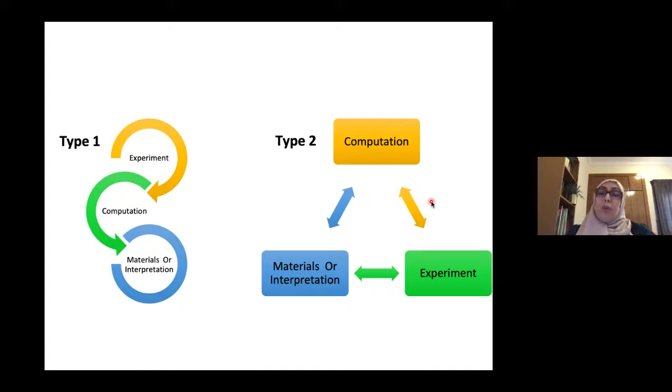So the first thing that I wanted to mention: in the previous talk, you mentioned stability, and indeed, even the hybrid perovskite materials suffer from issues related to stability, because these are materials grown from solution processing at low temperature and so on. So they are very prone to decompose under different conditions such as humidity, ultraviolet and oxygen, and so on. On the other hand, there is another issue: if you take this methylammonium lead iodide, it contains lead, and a lot of people are raising the issue that lead might be toxic.

So we took this challenge, and we looked at these two major aspects that are putting the technology at risk to be deployed at larger scale. What we did is that we started to look at different modifications in the material composition in such a way that we can screen for stable and non-toxic materials. In some cases, we took hybrid perovskite halides and tried to improve their stability. On the other hand, we looked at other classes of materials that are lead-free, like the vanadates and also niobates and so on.

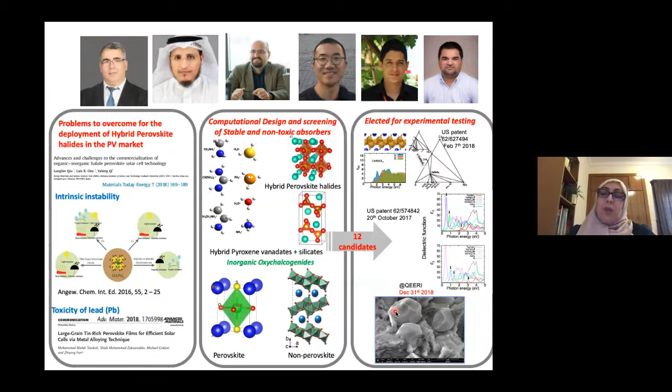And you can see that we have made some attempts to synthesize these materials, in this case the cesium niobium oxysulfides. The efforts are still going on, because it's not easy to optimize the conditions, especially when we are talking about a new material. Now let's move to the next.

So the other challenge facing this technology is that, here I'm showing some solar cells, and you see the cation sitting in the middle, which is an organic cation. If we change it, we can modulate the optical property, and if we change the halide, we can also change the optical property, the color, the efficiency and everything. So this leaves us with a huge space of possible combinations.

And you can see this is again the power conversion efficiency chart as a function of the years, and the community has moved from simple chemically processed MAPI material to a mixture of several cations and anions to be able to reach higher efficiencies, and also the desired stability.

It's more the stability that is an issue than the efficiency, to be honest. So then, what we did is that we started to do some high throughput DFT calculations, and then, by looking at the structure of those materials, by looking at the lead family and also the vanadate family, we quickly realized that it's going to be very, very challenging to analyze the data and come up with answers to our question regarding the stability in particular.

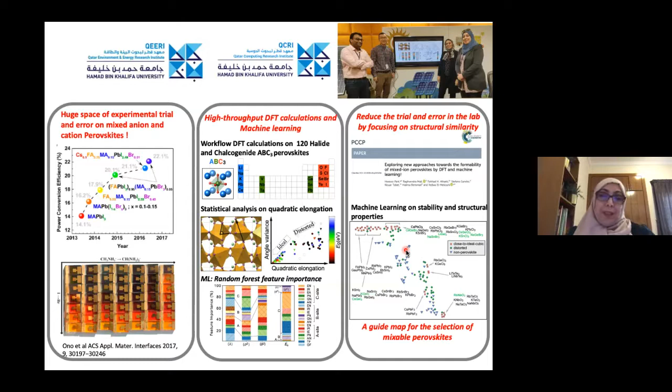And then we took it further. It was such a success that we moved from very simple cations to larger cations and organic cations, which was also a challenge. And then we built a database of all these calculations that you see here. This has resulted in thousands of DFT calculations, both in halide perovskites and chalcogenide perovskites.

And you can see here I'm displaying the graph showing the distortion of the octahedral deformation, or the octahedra that are composing the perovskites. And this correlates very tightly with their intrinsic stability. In fact, what I want to emphasize is that these perovskites often degrade very quickly because they are intrinsically not stable. They're in a metastable state, and this is why, when we mix these cations and anions, we bring them closer to their stable position.

And in that case, we called again for the help of machine learning to try to derive some trends, to try to see what are the most important features governing this type of deformation, especially the impact of the cation. We know that the cation is the best way to tune the stability of those materials without altering their optical properties in a significant way.

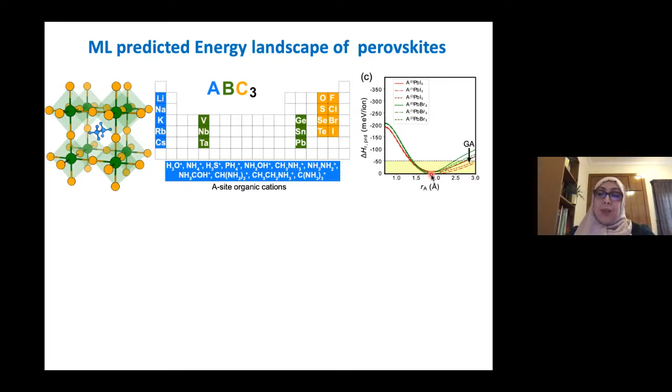Then I would like to highlight the team that helped us take that demonstration to the laboratory: Dr. Abdelhaq Belaidi, and Adnan Ali, who is a postdoc in the project. What we did is we said, let's use our machine learning model predictions to narrow the search and be able to synthesize some stable triple cation perovskites. In this case, we are mixing the 3 cations you can see here, and you can see the change in color when you change, for example, 2 cations and move in this direction.

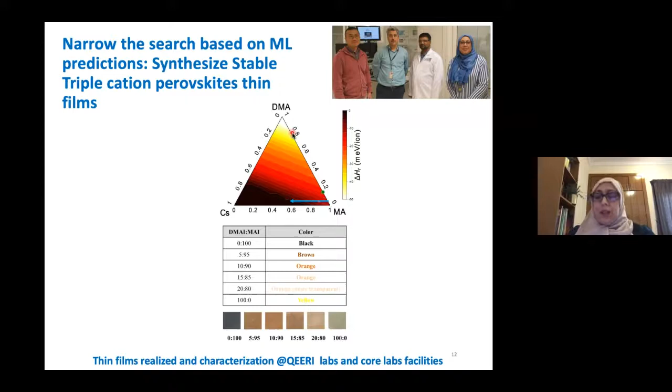They helped with characterization and imaging and so on, and I would like to thank the Core Lab facilities for offering this support.

I mean, we actually came up with a very good understanding of what is going on, and validation as well for our machine learning model predictions for this specific composition.

To move ahead, I want just to touch base on the team in Trinity. If you remember, the team at Trinity was specialized in looking at the other class of material, which is the 2D materials, heterostructures. So instead of looking at molybdenum disulfide and so on, there was an interest also to look at heterostructures. But the problem is that if you combine two dichalcogenide materials with each other and you do some optical spectroscopy, you cannot detect the contribution. Where is the contribution coming from?

So what Anais did in her work, she modeled using density functional theory a number of monolayers and bilayers of metal chalcogenide materials, and then she was able to extract some trends and so on. And then the question that we raised is, could we build a model that would help us to predict the properties of heterostructures or bilayers without having to do the explicit calculation, which is often very expensive? And that was really the idea of her work.

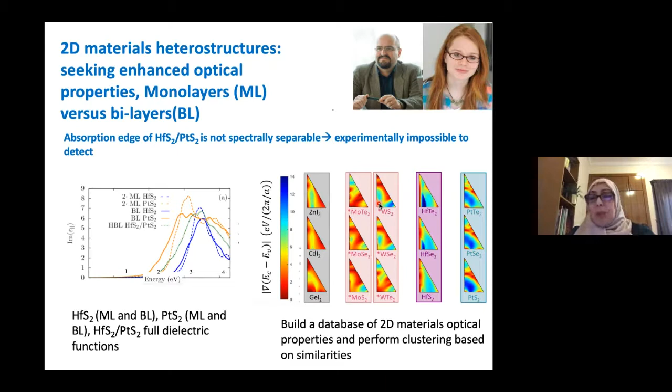So when she visited us in, I think, January 2019, if I'm not mistaken, she worked with us in trying to look at the different properties and their optical properties of these materials, and also to look at methods on how she can cluster and find two materials that can better match with each other in terms of optical properties, so who have a lot of similarities.

Next, I would like to highlight the work of Jenny. Jenny was under the supervision of Valeria Nicolosi, and she was coached by Noor and Fahad as well. She worked on trying to use exfoliated 2D materials for solar cell devices and testing. Valeria Nicolosi's group is specialized in exfoliation of 2D materials. She got trained to make devices based on 2D materials. But then there was a need for a huge amount of optimization to be able to get working solar cells with molybdenum disulfide.

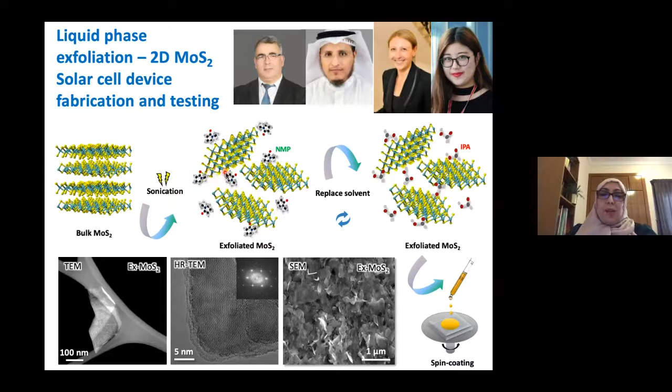It's normal. So as a mitigation strategy, we thought, why don't we try to use these dichalcogenide materials in perovskites to enhance the device lifetime and efficiency. That was based on previous publications that used other types of materials like C60 to enhance the hole transport and protect against the rapid degradation of the perovskites that is induced by the hole transport material.

And in that aspect, Jenny came to Qatar. She stayed in Qatar at least 3 months. In her second trip, she was tightly working with Annan and Dr. Beladi, and she managed to generate very interesting results using a molybdenum sulfide buffer layer for the synthesis of these materials.

So that was my last one. I wanted to show the contribution of each of the students, the postdocs, and so on in this project. But also, since I'm the last one to speak, I wanted to show in which landscape such a project has been maturing over the years. The seeding in terms of preliminary results started in QEERI in 2014, right after I joined QEERI. So I'm very thankful for the support.

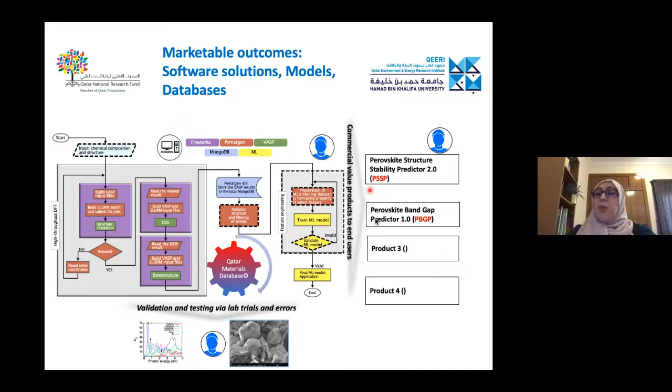And then we have created the Qatar Materials database, which is a local database that contains very unique data that we actually obtained from these automated workflows, and that we have been using in machine learning and to train machine learning models. And then as outcomes, we actually have some commercially valuable products for the end users, like this perovskite predictor and this perovskite bandgap predictor that we have disclosed to the IPTT.

But most importantly, what I want to emphasize is that this project has also opened more funding opportunities in other areas than just the solar cell industry, and a growing network of national and international collaboration.

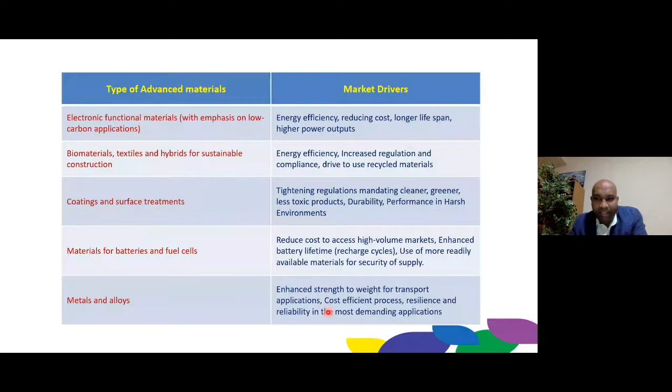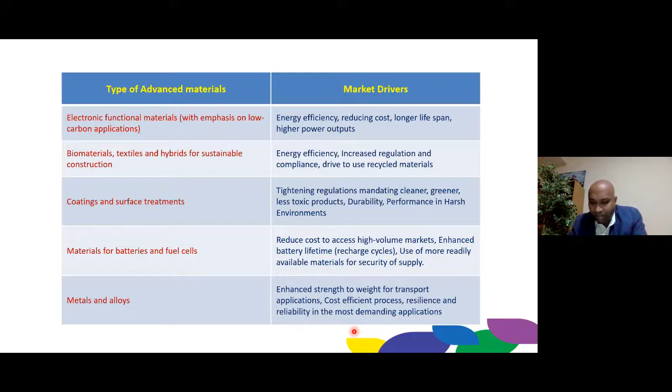When it comes to materials for batteries and fuel cells, we need reduced cost to access high volume markets, enhanced battery lifetime, recharge cycles, use of more readily available materials, metals and alloys. Enhanced strength to weight ratio for transport and structural applications, cost efficient processes, reliability in demanding applications. This gives the overall picture of all the projects we discussed today and the market drivers for implementing this research.

I wanted to share this to try and encompass whatever we discussed today moving forward. The key for materializing a brighter future is you need to plant, and QNRF is involved in these activities - identifying the key area of investment and strengthening creative networks between industry, universities and government. And you need to nurture them, growing the opportunities by implementing a coordinated program of strategic investments in projects designed to enhance and sustain innovation. And when the time comes to harvest, you can reap the rewards by systematically exploiting the commercial benefits.

So the timeline for this - there were many questions in the chat window: is it already implemented, is it already manufactured? These are good questions, but we're still some time away from that. This is the blueprint we have to follow - you have to first plant and nurture. Most of the projects you see today are in that phase, the plant and nurturing phase. So we still have quite a time to go to the harvest phase, where you will see all these aluminum composites or bioengineering implants, plastic electronics - all the things we discussed today.

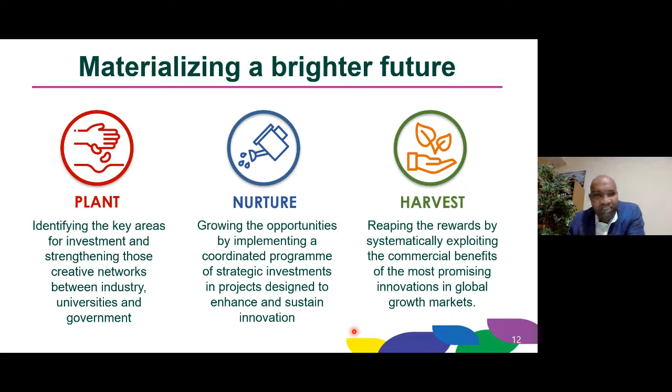So this shows the virtue of patience, and also investing in basic research, applied research, and all research. You never know where they lead into.